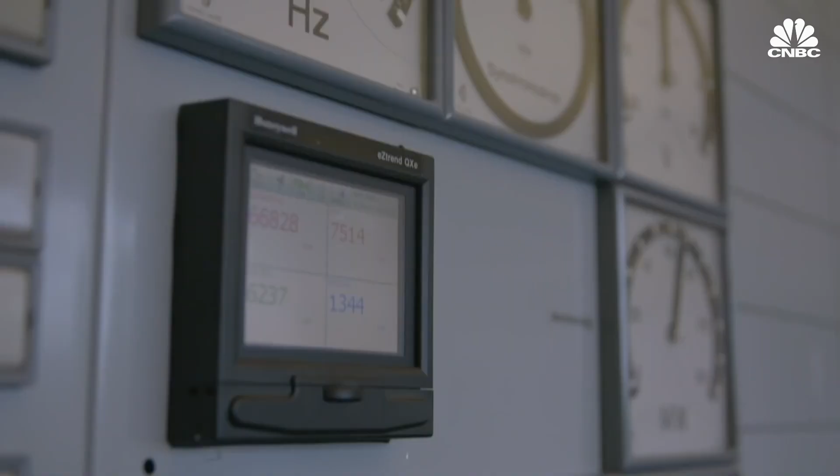Breaking boundaries. Green hydrogen takes center stage in the energy revolution. As world leaders come under growing pressure to tackle climate change, green hydrogen is gaining traction as an important part of the solution. But what is the reality around the hydrogen debate?

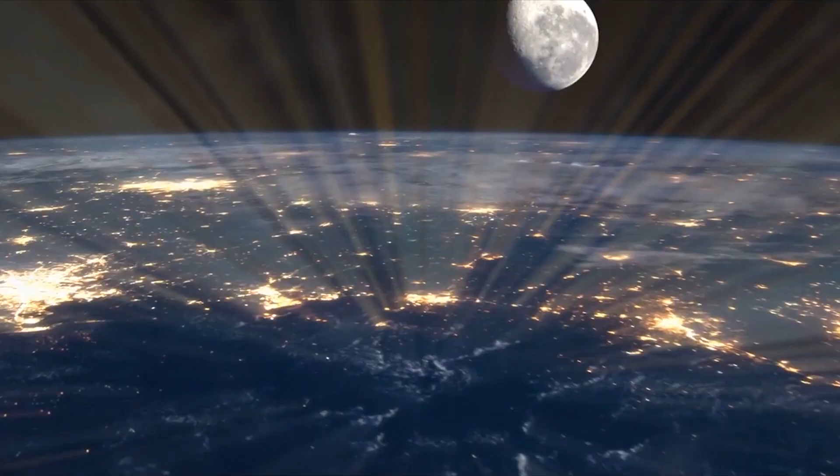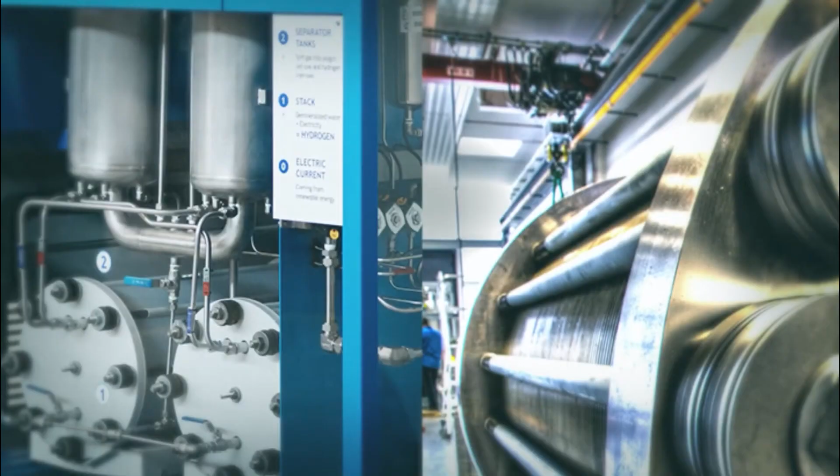One of the most prevalent elements on Earth, hydrogen offers us a special chance to switch to clean energy. Recent years demonstrate how dangerously close to a climate catastrophe we are. A sustainable future is imperiled by climate change. Confronting climate change offers a chance to advance wealth and better the future for us all. In that transition, green hydrogen, or GH2, and its derivatives will be crucial.

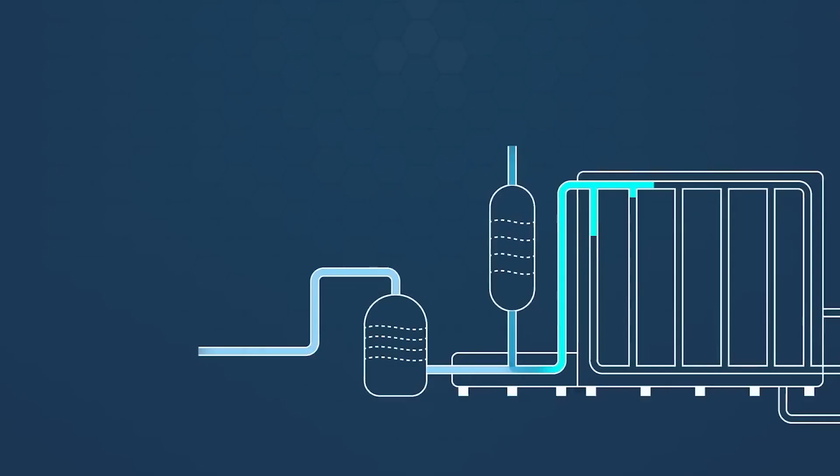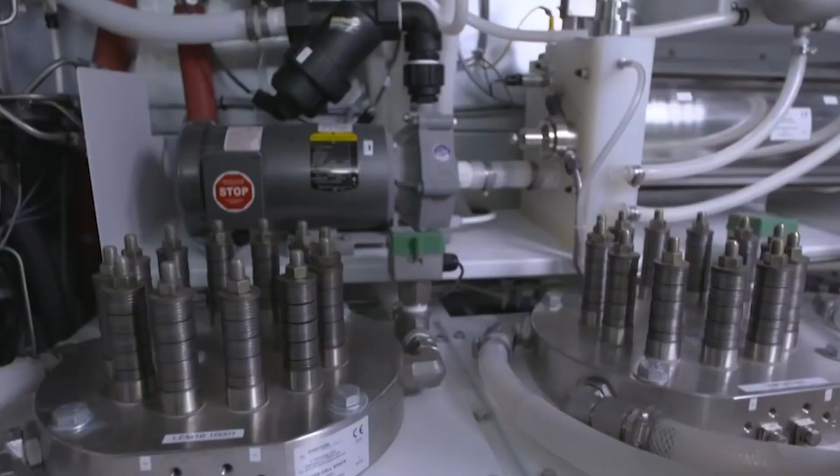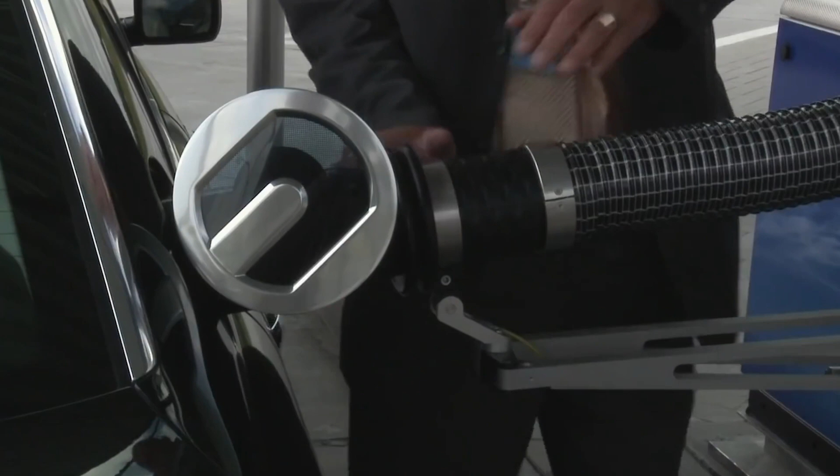When hydrogen is produced through electrolysis using renewable energy, it's referred to as green hydrogen, a clean and sustainable energy carrier. For industries that are difficult to electrify, like steel, cement, and the chemical industry, GH2 is a game changer. Right now, it's the only option we have for decarbonizing these industries. GH2 is adaptable since it can be utilized as a feedstock for industrial processes or as a fuel for combustion. In a fuel cell, it can also be transformed back into electricity. It can be stored and transferred over great distances, farther from the initial renewable energy source than grid-based renewable electricity.

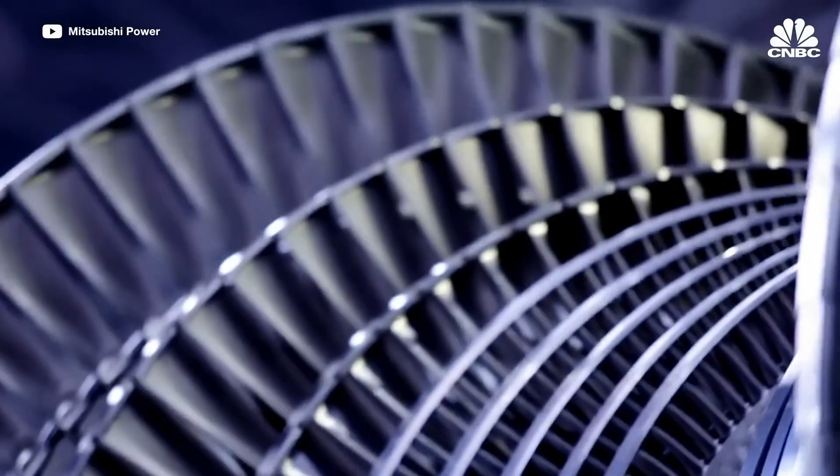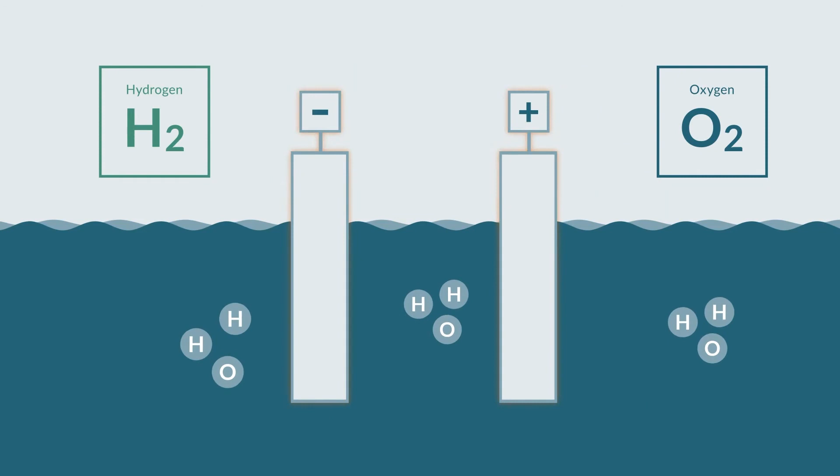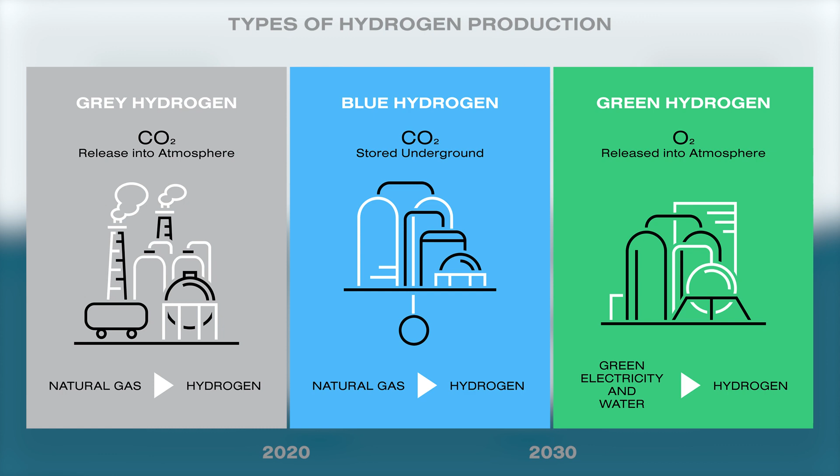Green hydrogen, produced by using renewable energy sources to electrolyze water and split it into hydrogen and oxygen, is one of the most promising alternatives to gray hydrogen, which relies on natural gas supplies and produces carbon dioxide that then needs to be released or stored.

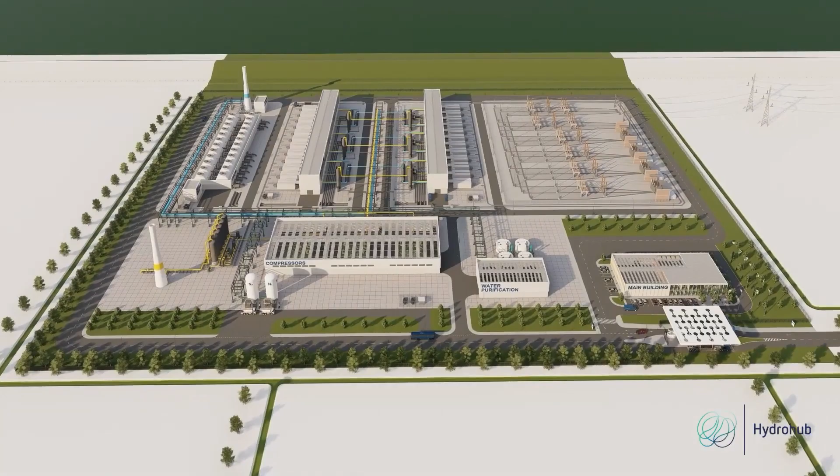According to a new report from Goldman Sachs Research, government incentives are powering major strides in green hydrogen investments, particularly in the United States. The size of clean hydrogen projects is measured by the gigawatts, or GW, used to power the electrolysis used in production.

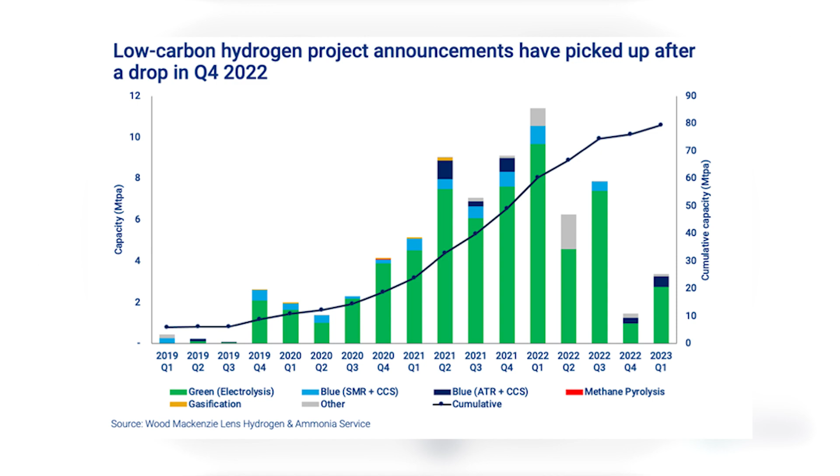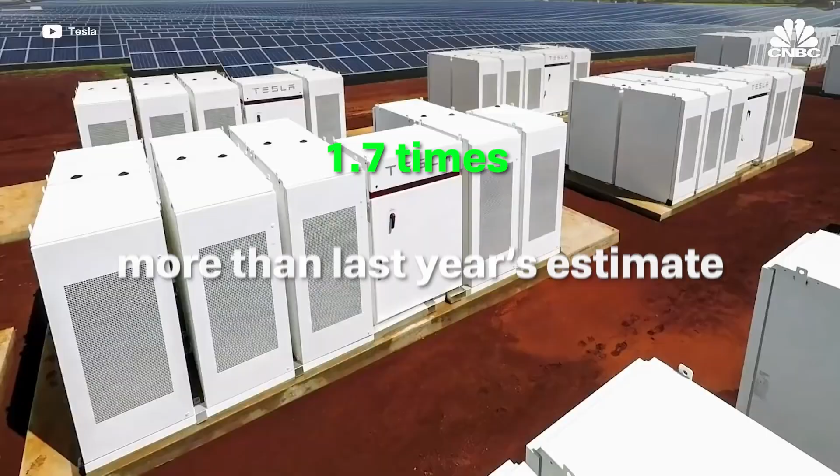By this measure, the market is still in its infancy. At the end of 2020, only about 0.3 gigawatts of capacity was installed. However, based on projects that have been announced, GS Research estimates as much as 137 gigawatts will be installed by the end of 2030, about 1.7 times more than last year's estimate of 80 gigawatts.

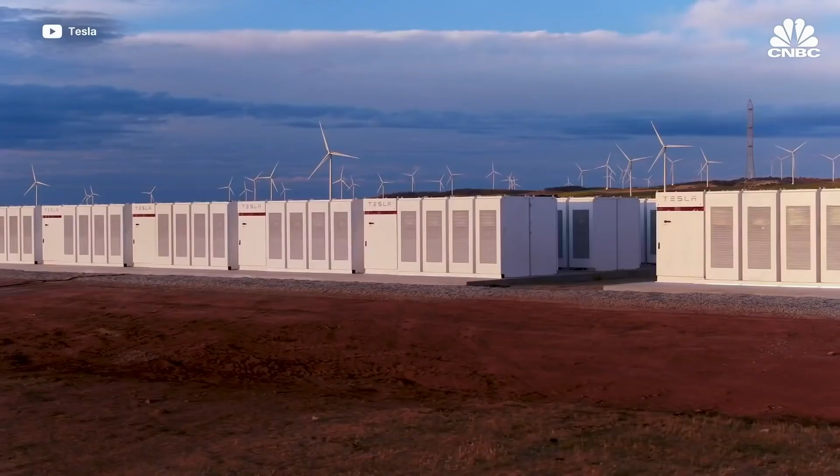Given the long lead times in creating clean hydrogen production facilities, GS expects even more projects will be announced in the next few years. Many of the projects for the second half of this decade have not yet been announced and are therefore not captured here, implying further upside, writes Goldman Sachs equity research analyst Michele Della Vigna.

The clean hydrogen industry is scaling up, not just in the number of projects planned, but also in their average size. The research team estimates that the average project will increase more than 600 times from its current dimensions.

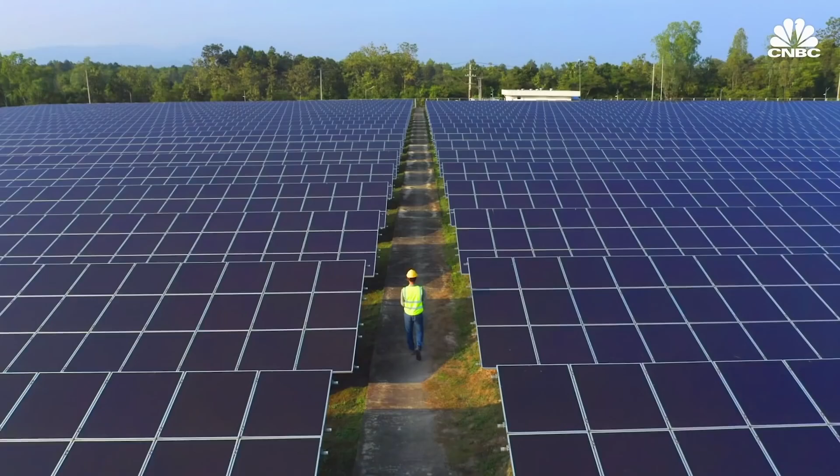Unlocking a decarbonized future. With so-called green hydrogen, the electrolysis of water to create hydrogen gas is powered by renewable energy rather than fossil fuels. Two obstacles to renewable energy are removed when it's converted into storable gas. Renewable energy sources are erratic because they depend on weather conditions, like sunny days and strong winds, and because their output doesn't always match up perfectly with demand.

Water and a device called an electrolyzer are all that are required to create green hydrogen, in addition to plenty of electricity. Its adaptability is unequaled after you have that crucial finished result.

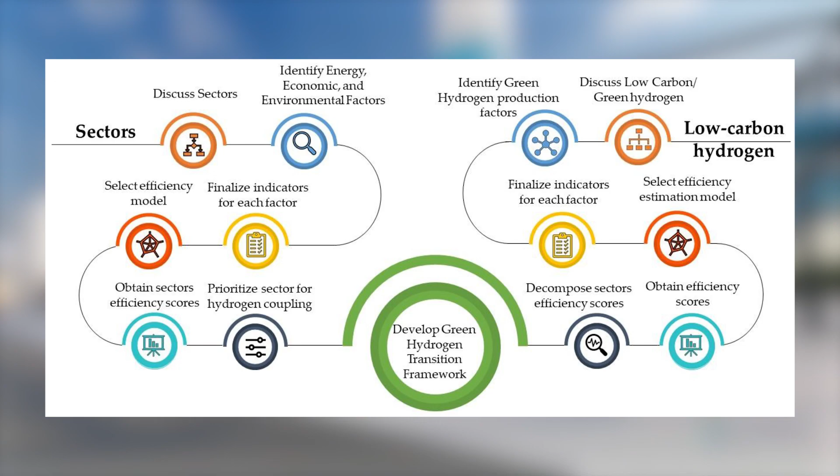Green hydrogen can be used to directly power fuel cells in automobiles or ships, burn in thermal power or heating facilities, or even just to partially replace the 10 million tons of industrial hydrogen that are produced from natural gas each year in the United States.

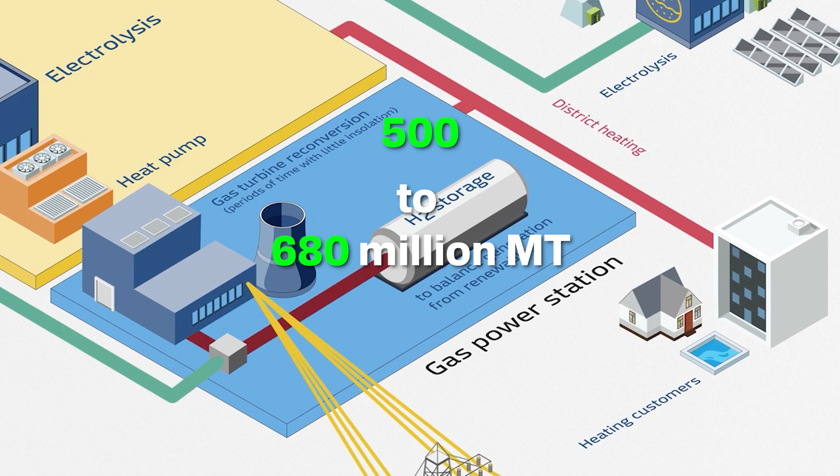The demand for hydrogen reached an estimated 87 million metric tons in 2020 and is expected to grow to 500 to 680 million metric tons by 2050. From 2020 to 2021, the hydrogen production market was valued at $130 billion and is estimated to grow up to 9.2% per year through 2030.

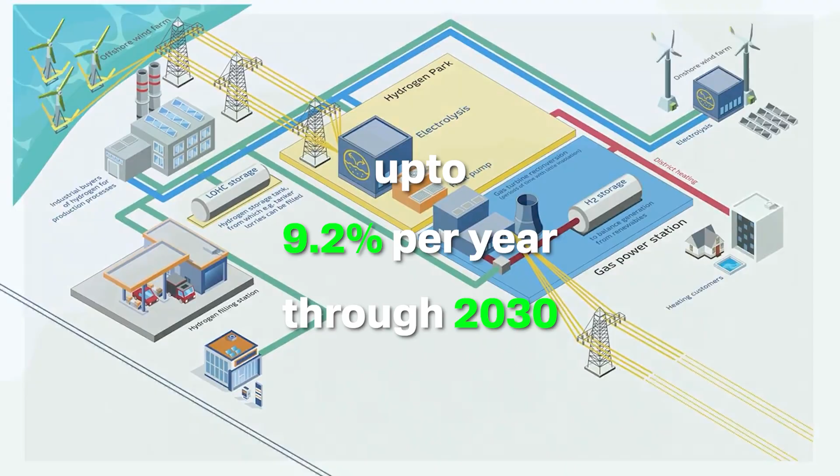But here's the catch: over 95% of current hydrogen production is fossil fuel based, and very little of it is green. Today, 6% of global natural gas and 2% of global coal go into hydrogen production.

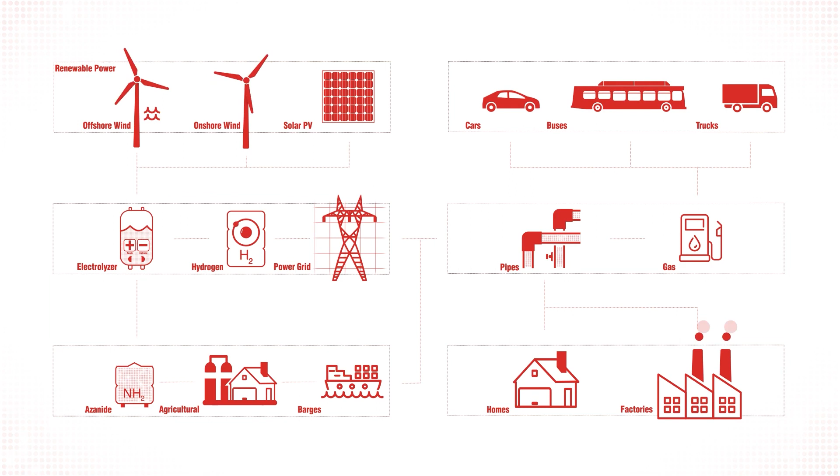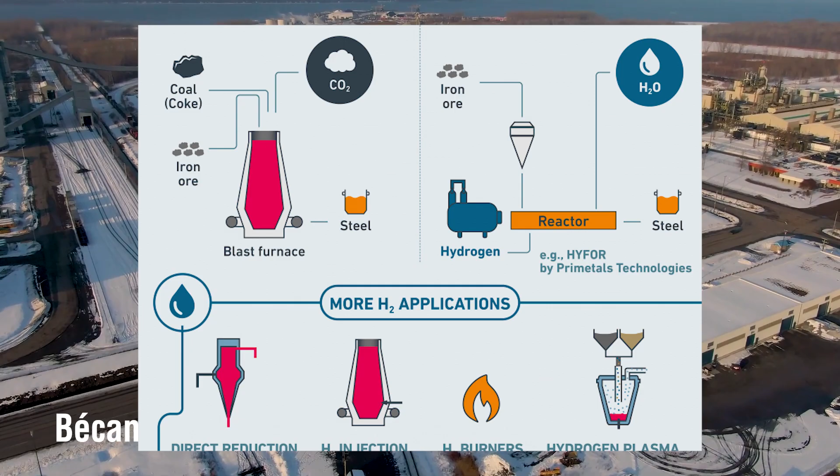But there is a resurgence of interest in environmentally friendly hydrogen manufacturing techniques. This is due to the fact that the potential applications for hydrogen are growing in a variety of fields, including power generation, manufacturing processes in the steel and cement industries, fuel cells for electric vehicles, heavy transportation like shipping, production of green ammonia for fertilizers, cleaning products, refrigeration, and grid stabilization.

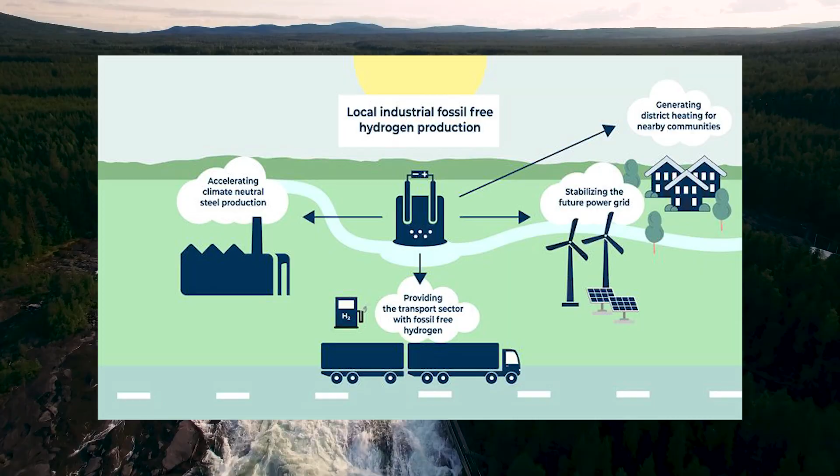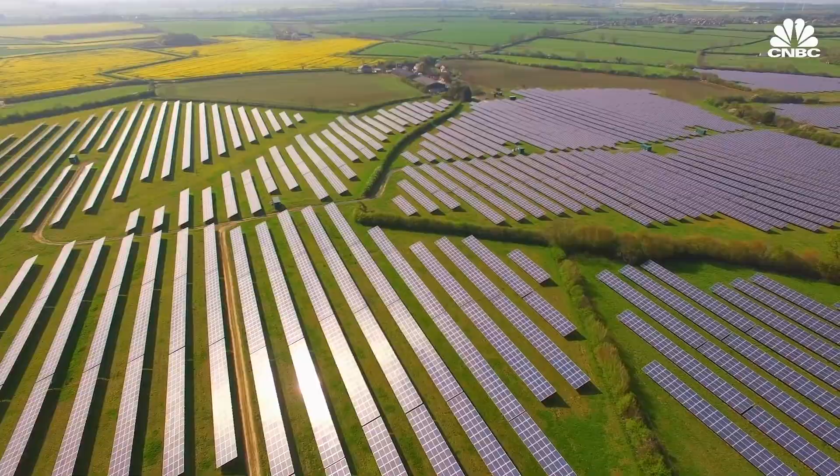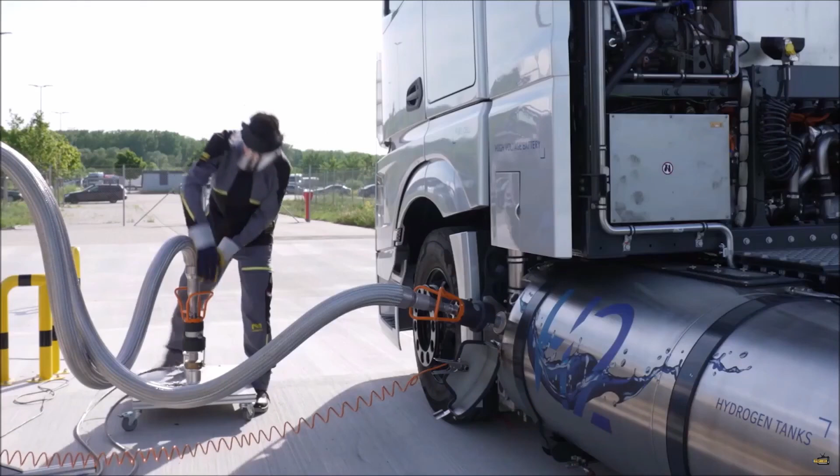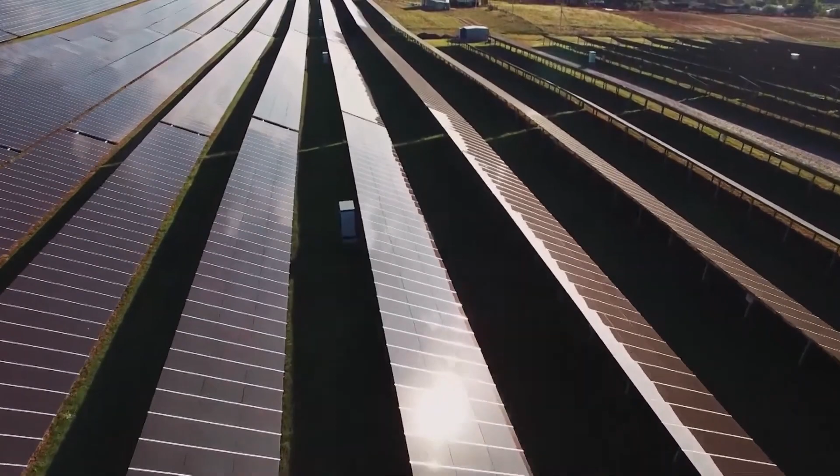The effects of US policy changes: the US has historically lagged behind the rest of the world in clean hydrogen development. Still, the incentives in the Inflation Reduction Act have spurred a development boom in the US, with planned installed capacity jumping to 12 gigawatts from 2 gigawatts by 2030. The increase will help the US narrow the gap with the rest of the world, but likely not close it since projects in Europe, Australia, and other parts of Asia are also accelerating.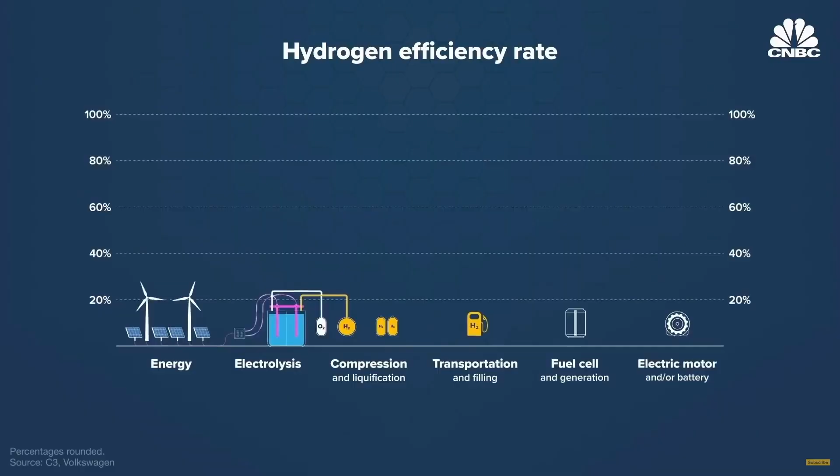The report estimates that Europe will drive installed capacity growth, adding 50 gigawatts of cumulative capacity by 2030, followed by Australia with 34 gigawatts, Africa with 25 gigawatts, and Latin America with 17 gigawatts.

Production tax credits: these 10-year credits apply to developers who produce clean hydrogen beginning this year, or begin construction of new facilities before January 1st, 2033.

Investment tax credits for energy storage: the IRA expands the scope of the existing credits for energy storage to include hydrogen.

Clean vehicle credits: the credits extend to vehicles that use hydrogen fuel cells and electric batteries, and offer significant credits for commercial vehicles for which hydrogen is particularly well suited.

Alternative fuel credits: the IRA provides property tax credits for expanding alternative fueling stations, encouraging more hydrogen transportation infrastructure.

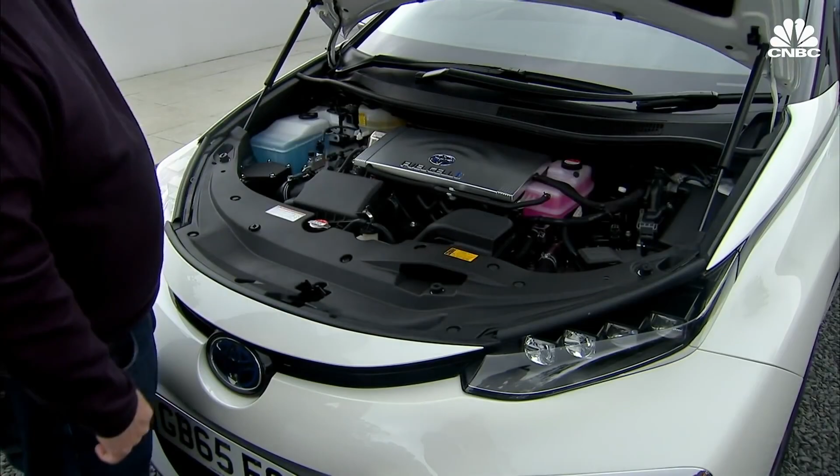By the team's estimation, a $3 tax credit for every kilogram of hydrogen produced would lower the cost of clean hydrogen to that of hydrogen currently produced with fossil fuels. This effectively fully bridges the cost gap between gray hydrogen and green hydrogen from renewable power.

The few pioneering projects that have reached successful commercial and financial close and have transitioned to operations have tested the financing parameters and established bankable project structures and documentation packages that commercial scale projects can reference, under preparation across the globe.